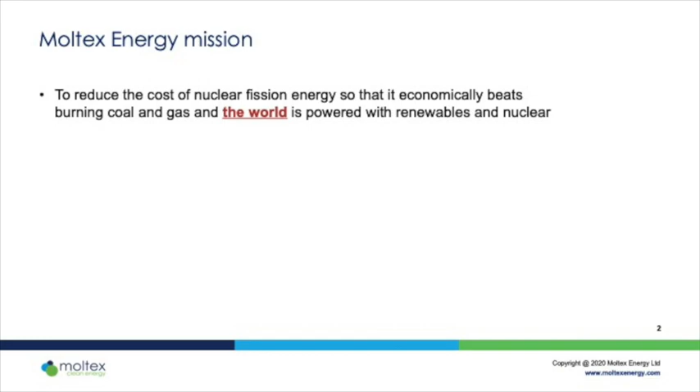The mission of Moltex is quite explicitly financial. We believe that nuclear energy will only make a real consequence to solving the global warming problem if it can be brought down to a cost where it is cheaper to use nuclear than it is to burn coal and gas. And subsidies can get you started, but you will not achieve real global penetration without that cost advantage. And that is what Moltex Energy is all about.

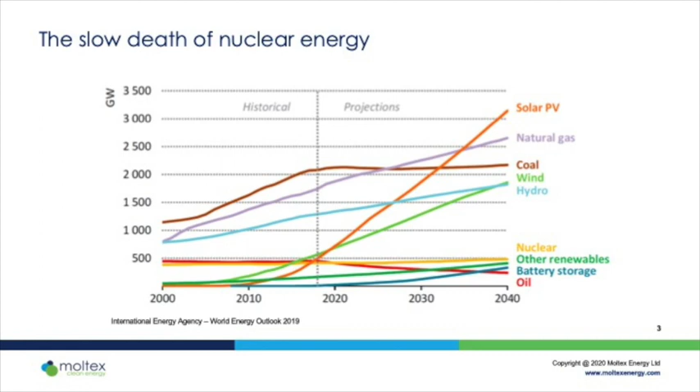The really depressing thing on this slide is the yellow curve at the bottom shows nuclear, which shows nuclear not increasing in any meaningful way in terms of total gigawatts of capacity. This is not what the world needs. So why is this happening? Why is the great promise of nuclear energy not being fulfilled?

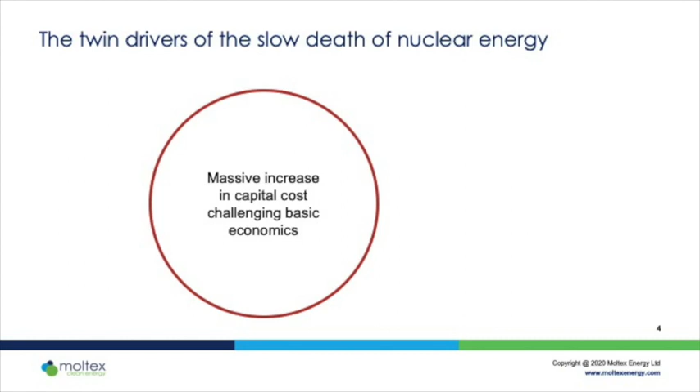There's really two reasons. And this is a slide which is deliberately provocative. The twin drivers of the slow death of nuclear energy, because that is what we are facing now. The first driver is massive increase in the capital cost. This is not news, but it is challenging the basic economics of reactors.

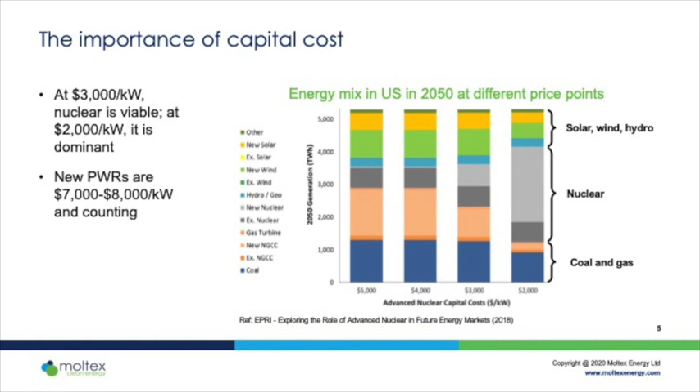There's a very good study came out from the EPRI in the USA looking at how nuclear's penetration in the USA would evolve at different capital price points. The message is very simple. If you can get your overnight capital cost down to $2,000 per kilowatt, then nuclear becomes a dominant power source. At $3,000 per kilowatt, nuclear becomes a significant contributor to power. Above that, and nuclear is essentially irrelevant and will not grow, will not roll out.

Where are we compared to that $3,000 threshold for viability? Well, new pressurised water reactors are running at $7,000 to $8,000 per kilowatt and counting. That number is going up all the time. So that is only one part of the story.

The second important factor, which is just as important as cost, is that the electricity markets are changing as renewables become cheaper and cheaper and penetrate deeper and deeper into markets. Renewables generate power at zero marginal cost, and that means that they will produce whatever the market says.

As a result, there are times when baseload demand is entirely met by renewables, and there is simply no need for a power generation source which is always producing 24 hours a day, 7 days a week. You need a power source which can produce 24/7, but a power source that must produce 24/7 faces economic disaster.

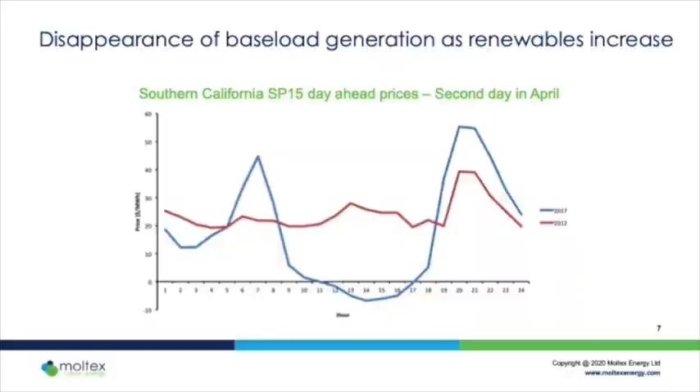What's happened between 2012 and 2017 was a major rollout of solar power. And the consequence has been that around the middle of the day, prices were going negative. Generators were literally paying the grid operator to take their power. That's not a great business proposition. That's getting worse.

So who's paying these negative prices? Well, two people, two organisations. One is nuclear. Nuclear cannot turn itself off quickly. The cost of coming back to power is too great. So nuclear will pay to have its power taken away.

And the other contributor there are renewables who have strike prices. If they get guaranteed that they'll be paid £50 per megawatt hour and they have to pay the grid £49 per megawatt hour to take the power away, they're still making £1. They will still produce, even though it's being produced at a clear loss. Such is the power of subsidies.

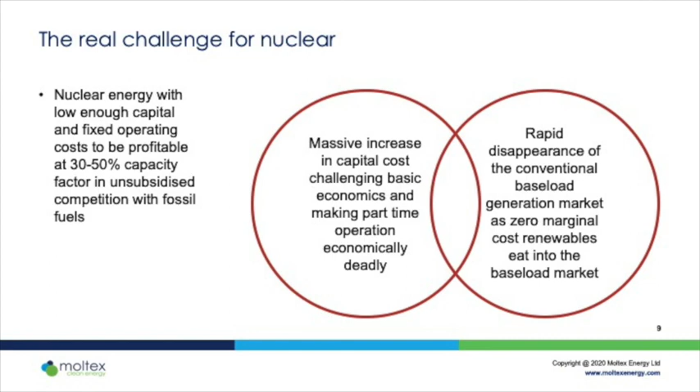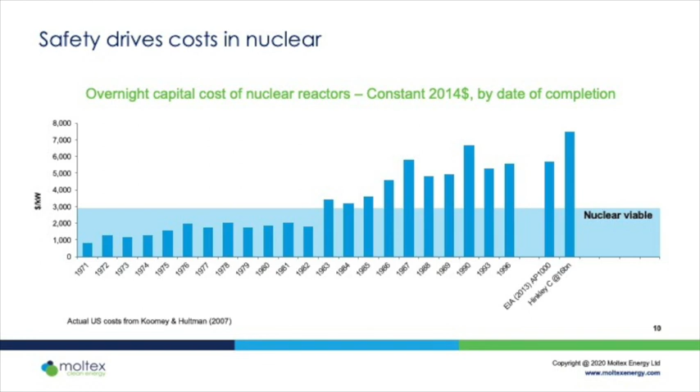So let's start with the solid fuel pellets. These are remarkably finely engineered structures. They trap the fission gases inside the pores of the fuel. And you have something like 50 volumes of fission gas to every volume of pellet. And the pellets are about 95% solid with only 5% void. That means you're looking at internal pressures of many hundreds of bar. And the pellets hold those in extraordinarily effectively until they don't.

And when they don't is when they reach about 1400 degrees centigrade, long short of any meltdown condition, at which point those pellets fall apart catastrophically, release large amounts of gas, rupture the tubes they're in, and release that highly radioactive gas into whatever containment you have around it. That's a fundamental hazard. We then take those intrinsically quite dangerous fuel pellets, we put them into a vessel surrounded by water at 300 degrees centigrade, which will, in the event of a pressure vessel failure, explode itself quite catastrophically. Boiler explosions are among the worst industrial accidents in history.

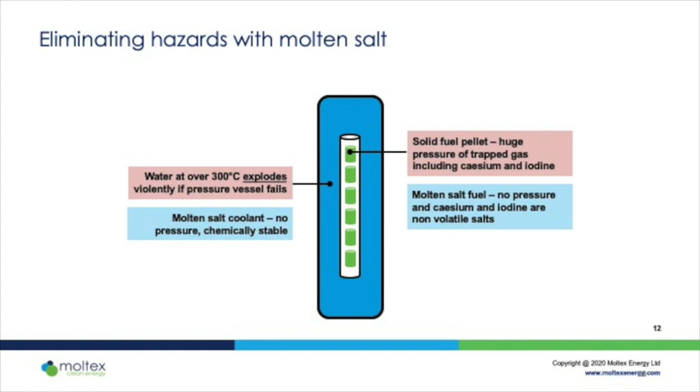Molten salts address this problem at two levels. In the fuel, they do not accumulate the fission product gases, and the most dangerous fission product gases, cesium and iodine, are not gases at all. They are stable salts, and they are only volatile when the salt actually boils. The second area you use molten salts is as the coolant. Replacing water with a molten salt coolant means that you have a coolant which is chemically stable, operates at atmospheric pressure, is not chemically reactive. At a stroke, you have eliminated two of the most important fundamental hazards of the reactor.

So, there are essentially two ways that you can use molten salt fuel in a reactor. First way, shown on this slide, is what I call conventional MSRs, molten salt reactors. These are molten salt reactors based around the molten salt reactor experiment done back in the 1950s and 1960s. And the principle is that the fuel and the coolant are the same liquid. So the heat is generated in the liquid fuel. The liquid fuel is then pumped out of the reaction chamber where it was critical into heat exchangers where hopefully it's not critical anymore, and it passes the heat to do something useful with. Apparently relatively simple in principle.

That means you are pumping an extraordinarily radioactive liquid at pressure around a relatively complex system with pumps, valves, heat exchangers, welded joints. And unless you've managed to produce the first plumbing system on the planet that can never spring a leak, you have to assume at some point there will be a leak. And then what do you do? It's a problem. It's not necessarily an insoluble problem, but engineering-wise, it's a very difficult problem.

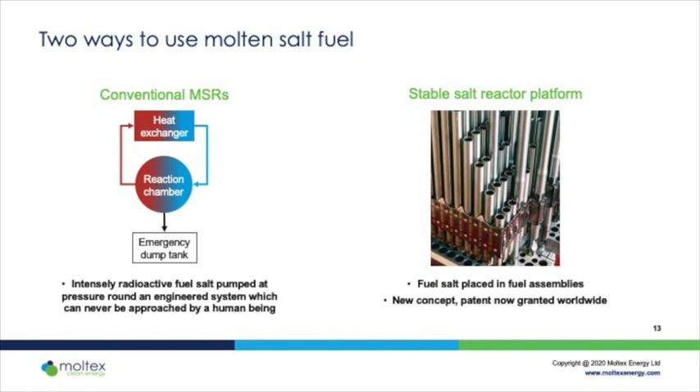The second way, shown on the right-hand side of the slide, is the stable salt reactor technology platform. And this is the simple concept that you put the fuel salt into fuel tubes, rather similar to the fuel tubes used in conventional reactors. We're essentially replacing the uranium oxide with a molten salt. This is, believe it or not, a radically new concept. The patent was filed in 2014. It is now granted in most of the major jurisdictions worldwide. It is genuinely novel. It has sailed through the patent process with very, very little difficulty. It seems extraordinary that idea could actually be novel, but it is.

And the reason it's novel is that it was actually considered back in the 1950s by the precursor of the molten salt reactor experiment, who considered putting molten salt fuel in fuel pins because it's a pretty obvious thing to do. They concluded that it didn't work. And the reason they concluded it didn't work was that molten salts are actually quite poor conductors of heat. And they calculated that you couldn't get the heat out from molten salt.

However, what is not in the published literature is that their conclusion was based on ignoring convection as a heat transfer process in molten salts. And heat transfer in liquids is dominated by convection. They made that assumption for a good reason.

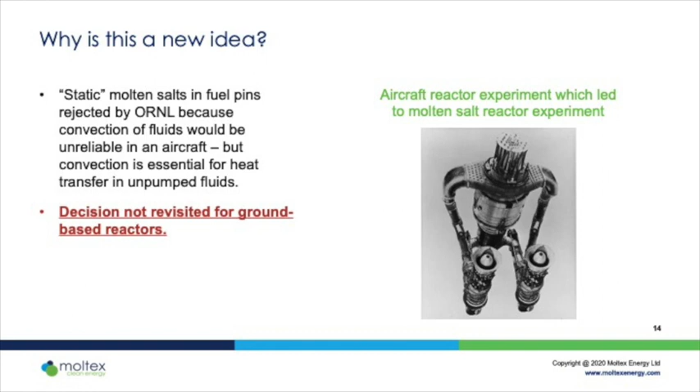They were designing an aircraft powering nuclear reactor, and that would have to be largely independent of the force and direction of gravity. And so they had to ignore gravity and therefore ignore convection. That decision was never revisited when people gave up on the idea of putting nuclear reactors into aeroplanes, until we reconsidered that 6 years ago.

Okay, so this is a platform technology. Putting molten salt in tubes in a reactor is the basic platform technology. There are two implementations of that platform that Moltex is currently working on. First is a fast spectrum reactor that we call the SSR-W, where W stands for Wasteburner. It's a reactor which is fueled by higher actinides recovered from conventional nuclear fuel.

It's a chloride salt fuel. It uses a zirconium fluoride based coolant salt. It operates continuously with on-power refueling, and it has completely passive emergency heat removal to the atmosphere. I'll talk a bit more about that reactor.

The second one, which I'll say much less about, is a thermal spectrum version fueled by less than 5% low enriched uranium, conventional fuel supply, graphite moderated, but uniquely I think among molten salt reactors the graphite does not contact the fuel. The fuel is a uranium sodium fluoride salt mixture. The coolant salt is proprietary. I'm sorry I can't share what that is with you at this time.

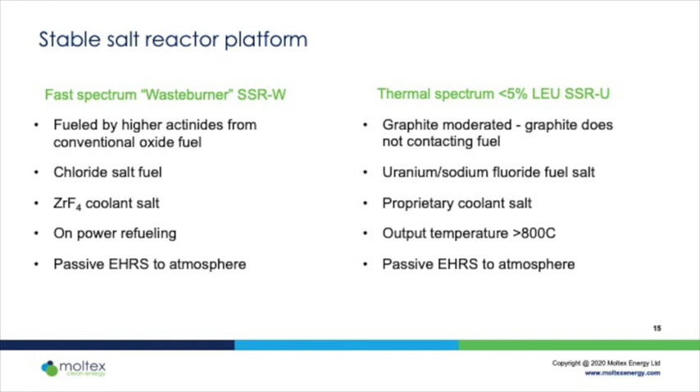It has a very high output temperature, greater than 800 degrees centigrade, and again it has entirely passive emergency heat removal. I won't say any more about the thermal spectrum reactor at this stage. So we founded this company in 2014. Progress on developing the SSR-W since then has been quite rapid.

The master patent was filed in 2014 and granted in 2014, the same year the company was founded, which is unusual. By 2018, we had established Moltex Energy Canada and granted that company exclusive rights to the SSR-W technology in North America. That same year, we signed an agreement with New Brunswick Power, leading to the development and deployment of this reactor at their Point Lepreau nuclear power plant site.

Since then, we've been working hard with the CNSC. We have almost completed the vendor design review. That will be completed this year, phase 1. We've received major investments from established nuclear companies, and we are getting significant support from Canadian government sources.

And we've also received very significant funding from the US ARPA-E research grants in the USA. So we have work going on at the US laboratories paid for very generously by the US government, which is a significant help both financially, and there is some really excellent expertise there. But I will say a little about the actual design of the SSR-W reactor.

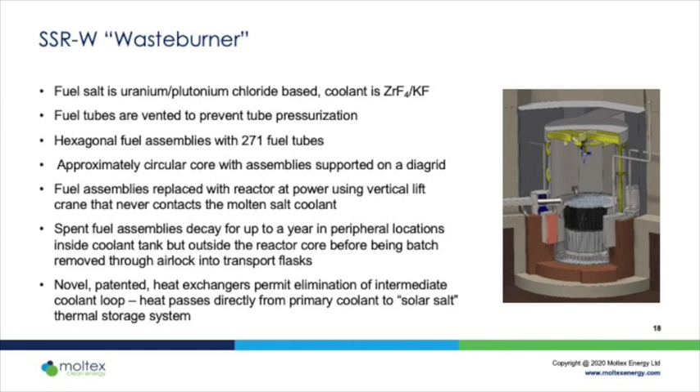So now I'd like to talk about the fuel cycle. No use having a nuclear reactor if you don't have fuel for it. The SSR-W is fueled with reactor grade plutonium and higher actinides recovered from existing spent nuclear fuel. And as everybody knows, reprocessing is a commercially non-viable proposition. Nobody's ever made it make economic sense. And we're not into commercially non-viable propositions in Moltex. So the fuel cycle is important to us.

So let me talk about reprocessing. Conventional reprocessing using variants of the Purex process is based on technology designed to produce weapons grade plutonium. That's for its purpose, and it does it very well. It produces plutonium of extremely high purity, well north of 99.5% purity. And in fact, if you're going to make MOX fuel for commercial reasons, you actually need that kind of purity. Those fuel pellets have to be very, very high specification, for all the reasons I said earlier on in this talk. For that, you need high purity plutonium.

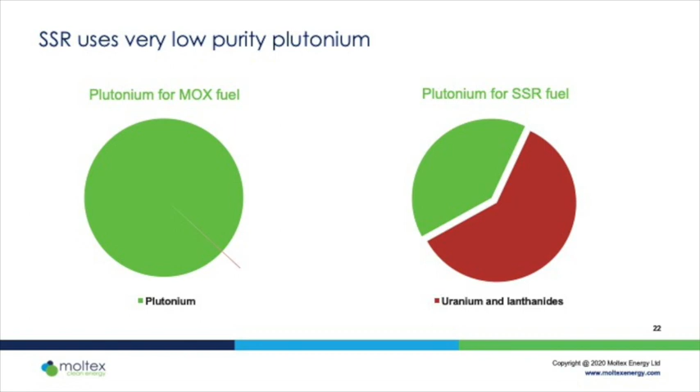SSR fuel does not require high purity plutonium. In fact, it doesn't particularly want it. The plutonium for the SSR can be contaminated with more than its own volume of uranium, and it can contain quite a substantial amount of lanthanides, which is important because lanthanides are the chemical that's actually quite hard to separate from plutonium. We don't separate it. So the fact that we can tolerate this really very low purity plutonium opens up options for reprocessing which just don't exist without the SSR-W reactor.

Those pellets are fed into an electro-reducer, and the key novelty here is we don't simply reduce the pellets to uranium, we also add iron to the system. So they're actually reduced to a uranium iron alloy. That's important because uranium iron alloys melt at about 725 degrees centigrade, whereas uranium melts at 1100 plus. And so it is a far more practical proposition reducing at that temperature range. The output from the electroreducer is a uranium iron alloy which also contains the plutonium and higher actinides, a fraction of the lanthanides, all of the noble metal fission products, and pretty much nothing else. The waste product from the electroreducer is a very concentrated electrolyte containing most of the radioactive fission products.

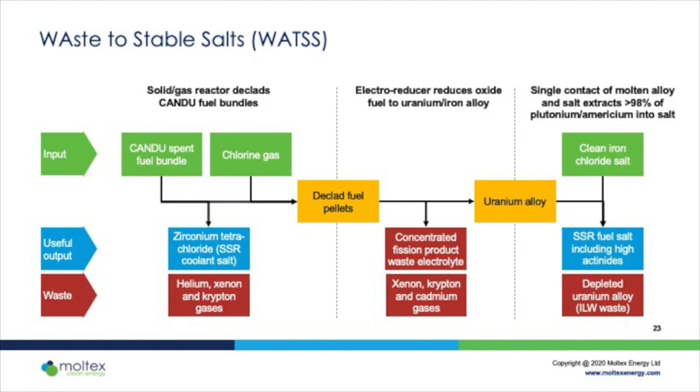The third step is to take that uranium alloy and extract it by contacting it with a clean salt mixture containing an iron salt. The iron exchanges with the plutonium and the americium and a small amount of the uranium in the alloy, extracting those actinides into the salt. A single contact will remove, or is predicted to remove, more than 98% of both the plutonium and americium into the salt. In our design we have two successive contacts, so we recover essentially all of the higher actinides into the salt.

Looked at in overall terms, what this process does, it converts about 99% by weight of the spent fuel into a uranium iron alloy. This has essentially no decay heat, minimal radioactivity. It could be disposed of as intermediate level waste, or it can be stored at surface locations for future use. It contains uranium. At some point uranium is going to become a valuable material. It will be a store of value for the future.

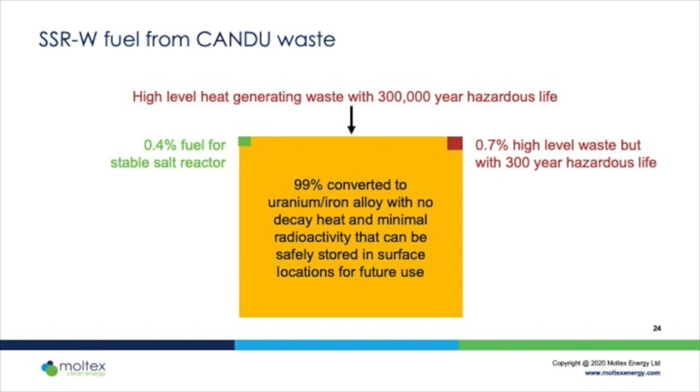The process produces about 0.4% of the weight of the spent fuel as our fuel for the stable salt reactor, and it produces about 0.7% by weight of a high level waste which contains most of the reactor fission products but has a relatively short hazardous life because it is essentially completely actinide free. Storage or disposal of that is something which will be new to the nuclear industry, but is an intrinsically less difficult thing to achieve than for the original spent fuel.

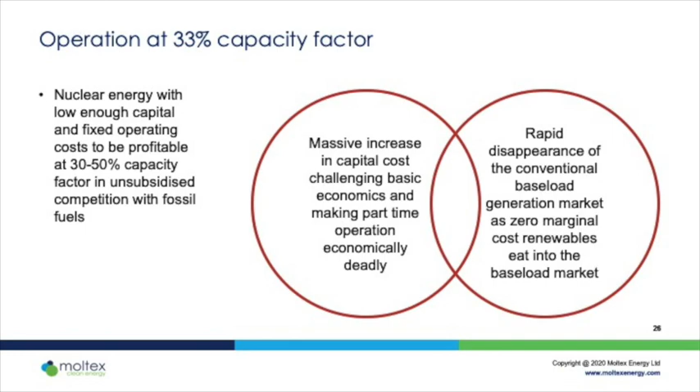I'd like to now talk about the third key technology in the Moltex proposition. We call this Grid Reserve, and this is cheap gigawatt hour scale energy storage. Going back to the slide I showed earlier, the real thing we need to achieve is economic operation at something like 30 to 50% capacity factor. And that is something which is challenging, but essential given the way electricity markets are evolving.

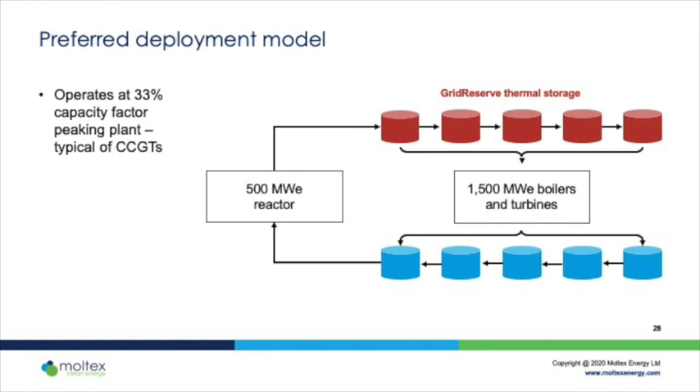This slide shows how we intend to deploy the SSR reactor. We would have a 500 megawatt output reactor, 500 megawatt electric, so about 1250 megawatt thermal. That heat output goes into the grid reserve thermal storage tanks, and those will feed boilers and turbines in our base case design at 3 times the power capacity of the reactor. So we have a 500 megawatt reactor driving a 1500 megawatt power station.

Looking at the numbers, and again this is for the UK, every country will be different. In the UK, over the 3-year period 2017 to 2019, the system selling price averaged over the whole period was £47 per megawatt hour. If you just sold your electricity into the best 8 hours of each day, then that same electricity is worth £70 per megawatt hour. That's a premium of £23 per megawatt hour at a cost of adding in the grid reserve and the greater turbine capacity of about £7 per megawatt hour. It is an economic and business no-brainer to do this.

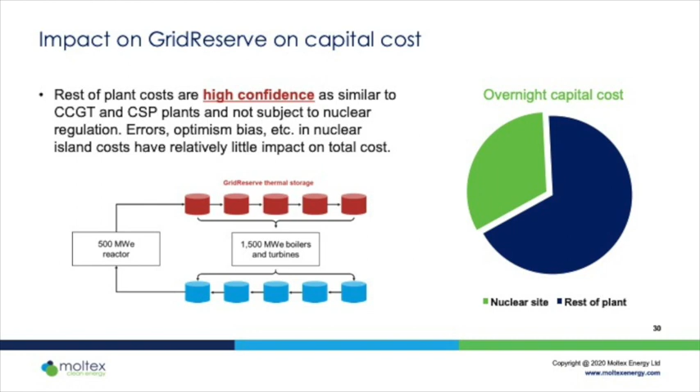This means that if you have errors, and everybody has errors in their assessment of nuclear costs, they don't make that much of a difference. So if that nuclear cost doubled, the impact on the overall capital cost is only about 25%. That brings the risk factor in building nuclear down really very substantially.

So pulling this together, what does this mean? The economic benefits are, first of all, doing your safety right. Eliminate the hazards. Don't try to engineer solutions to those hazards. And secondly, use grid reserve so that you produce your power at the right time and you reduce the nuclear fraction of your power plant cost.

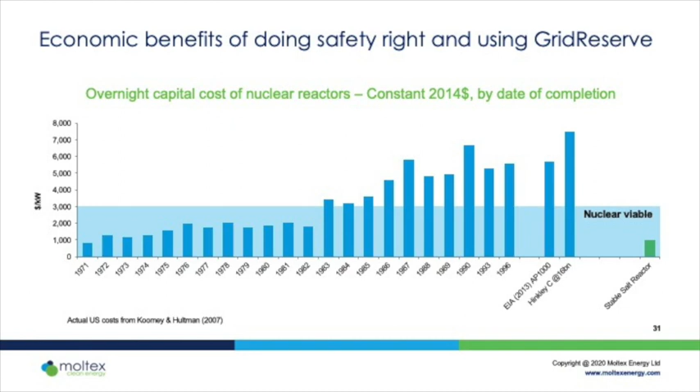This is the graph I showed before, showing how power plant costs have escalated over the last 40 or so years. The stable salt reactor is at the end there. This is in the configuration where it has a 1,500 megawatt output and a 500 megawatt reactor. And you're looking at costs around $1,000 per kilowatt. That is extraordinary. It is extraordinary.

Most important, you could triple the nuclear cost and still be very, very comfortably within the $2,000 to $3,000 region where you need to be for financial viability. This is enormously important commercially. It reduces the risk of the investment by a very large factor.

So let me just summarize. The concept of putting molten salt fuel in essentially conventional fuel assemblies is a genuinely new concept. It eliminates a large number of the difficult engineering challenges that molten salt reactors face. The low nuclear island cost itself, coupled with the fact the nuclear island is a relatively small part of the total cost, reduces the overall capital cost well below $2,000 per kilowatt, using conservative assumptions for optimism bias on our costs, with a really quite high confidence that that cost will not be exceeded.

Thirdly, grid reserve, thermal energy storage, which I regret is available to everybody. I'd love it if we had that patented, we don't. Grid reserve makes nuclear energy a real partner to renewables in a market where renewables can produce electricity at essentially zero marginal cost. Energy storage is essential for commercial viability, and thermal energy storage is the way to achieve that.

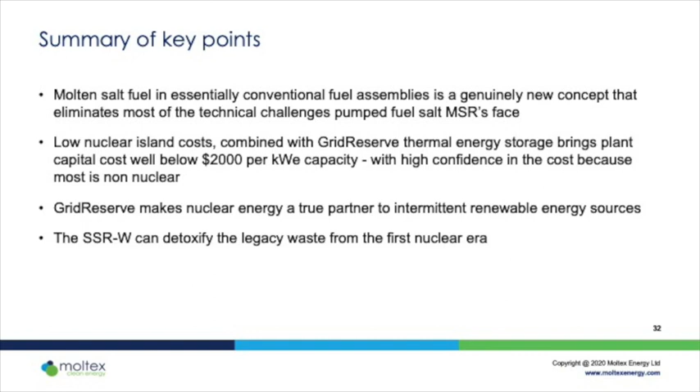And finally, and far from least, the SSR-W, the Wasteburner reactor, can detoxify the legacy waste from the first nuclear era. That is something which is really quite important to developing the social license for nuclear in more countries. People worry a lot about nuclear waste. A solution to that which reduces its longevity and cost and potential impact on future generations goes a long way to make people accept nuclear energy.